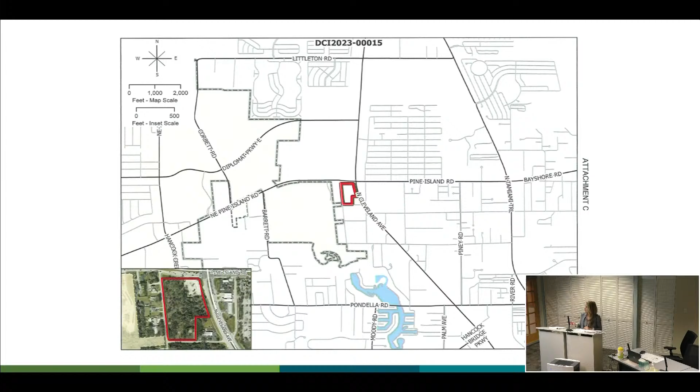The subject property is located at the southwest intersection of Pine Island Road and North Cleveland Avenue in the North Fort Myers planning community. This is an intensive urban area of the county, well served by public infrastructure.

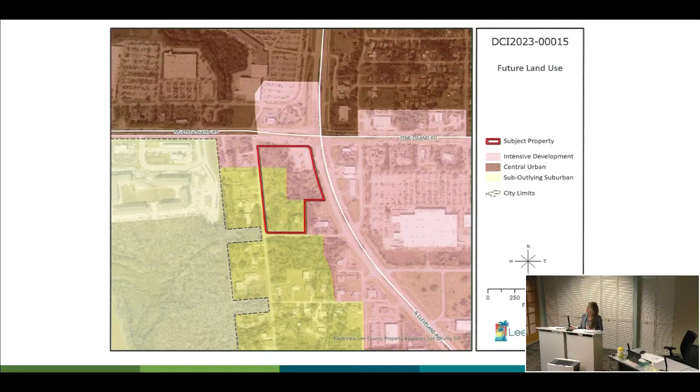Zooming in on the site, you can see the underlying future land use category. It's bifurcated between intensive development, shown in pink, which is about 5 acres of the site along those arterial frontages. The yellow depicts outlying or sub-outlying suburban, which applies to the southern portions of the site as well as that western edge, where we have reduced the intensity of uses to comply with future land use, as we'll discuss in the presentation.

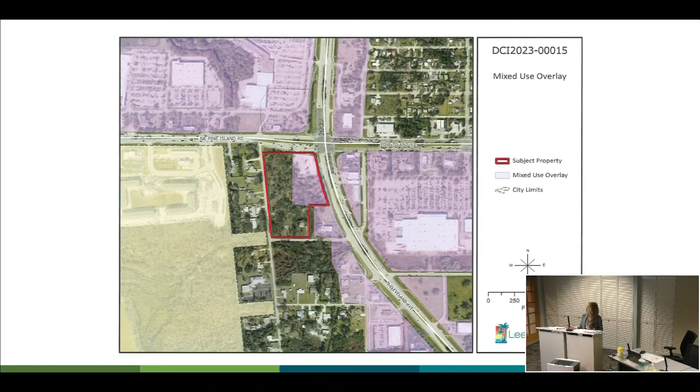The property is partially within the mixed-use overlay, which encumbers the frontage of the property. Just under 4 acres of the site, shown in purple, is within that mixed-use overlay. Lastly, we are in a mix of C1, C1A, and Ag2 zoning districts currently.

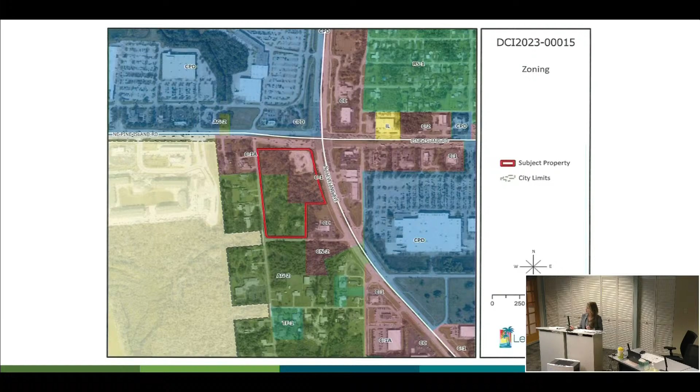In terms of surrounding uses, again, this is an urbanized area of the county, as you can see from the level of development surrounding the subject property. To our north, we have a development of regional impact and planned development zoning district known as Merchants Crossing. This has several big box retailers, restaurants, and has been recently redeveloped with an apartment component, so a very dense, intense mixed-use project immediately to our north.

As you go to the east, you have a Walmart big box retailer, as well as commercial outparcels along the North Cleveland Avenue frontage.

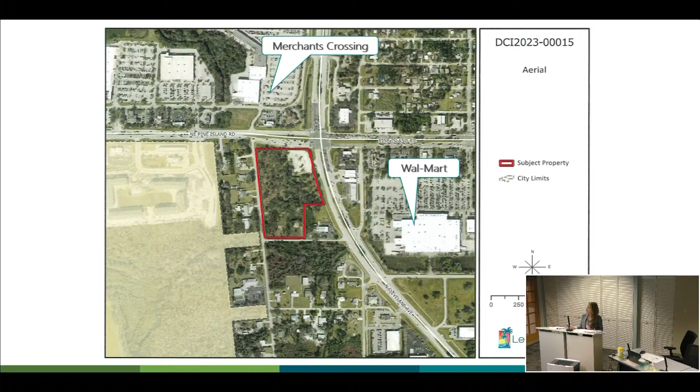To our immediate west, on the west side of Herron Road, there are some single-family residences remaining in the Ag2 zoning district that have been developed for many years and are certainly feeling the effects of the changing nature of the surrounding area, but we have buffered them carefully, as we'll walk through in the presentation today.

Also important to note, you enter into the city of Cape Coral as you move further west down Pine Island Road. This is the Jud Creek PDP area, and this is multifamily dwelling units developed at densities up to 25 units per acre per their future land use.

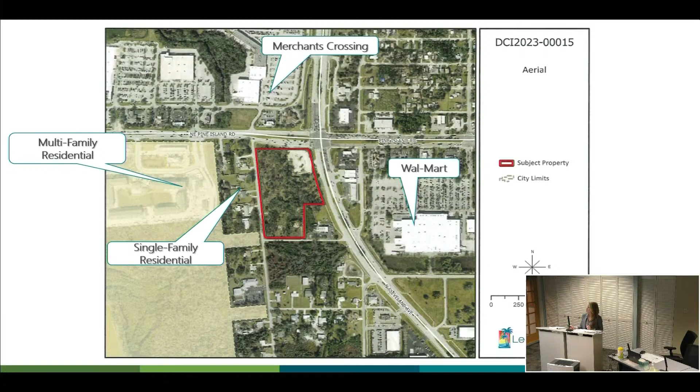This is our proposed master concept plan. We have a right-in, right-out off of North Cleveland Avenue. We also have a right-in, right-out off of Pine Island Road. We have a tertiary access point off of Herron Road as well.

There are no access points onto Pineapple Lane. It is understood Herron Road is substandard, and we will have to improve the roadway up to our driveway in accordance with Chapter 10 of the LDC. We're not seeking any relief from that requirement.

We've talked about the use areas. Our master concept plan is showing the fast food option. In terms of those use areas, the fast food will be located at the corner of the site. As you move south, we have the 7,800 square foot retail building that could include a variety of goods and service type uses. The auto repair building is further south in the property. We have the 100,000 square foot self-storage.

It's important to note the sub-outlying suburban is roughly this area of the site, as you saw on the future land use map. So we did locate the lesser intense uses of self-storage in that location for compatibility with the future land use category. But isn't the car wash also in that category? The car wash, yes, is located within the sub-outlying suburban portion of the site.

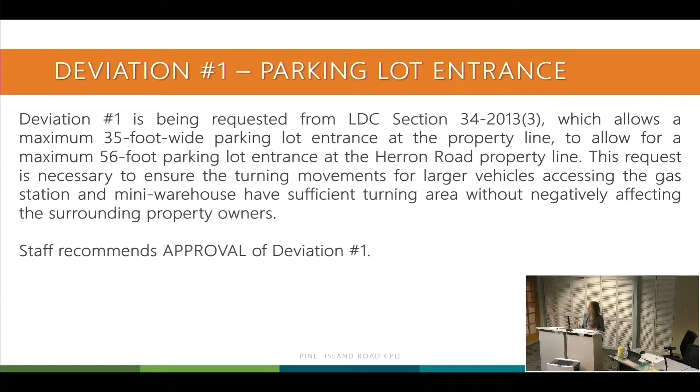So is it the intention to route the tanker trucks down Herron Road to serve the gas station? Ideally not, but it's a possibility, and so we wanted to design to that standard.

Is there a master concept plan for me to see with the gas station on it, since you're designing for it? I believe in discussions with staff it was preferred that we do not have two separate master concept plans. So where would it be configured on the site? It would be in this location at the north east corner. So that small area can accommodate the store and all the pumps? I will defer to our civil engineer, they will provide testimony a little later in our presentation. Okay, I'd like additional testimony on that, please.

Deviation 2 is related to the self-storage parking requirement. Ted Treesh prepared a parking demand study. This was based on also a previously approved parking demand study for Arborwood. Staff has reviewed the data and analysis and also recommended approval of this deviation. We would note that it would apply to both mini warehouse and public warehouse. As Ted will testify, the ITE treats these uses the same - they both fall under ITE code 151, mini warehouse. So that document would not need to change based on the addition of public warehouses. They function the same from a traffic standpoint.

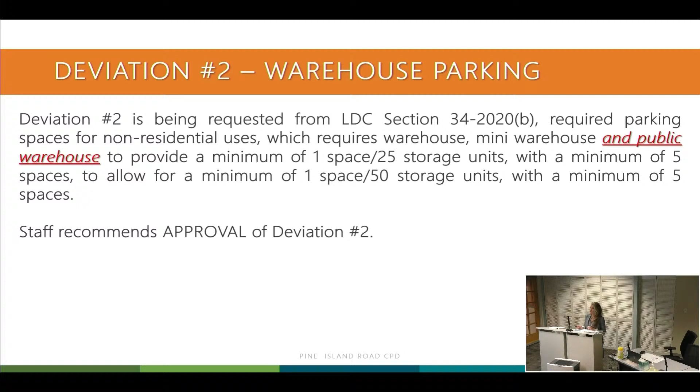This is simply, to the extent relevant, stating the definitions of warehouse, mini warehouse public, and mini warehouse in the code definitions, and they are tied together via their definitions. It's just a function of how they're accessed by patrons, with public being indoor units and mini warehouse being the garage door style of units.

So I've covered these points. They function the same. Both are going to be retail style self-storage.

Staff agreed that the parking demand analysis did not need further review upon addition of that use. Deviation 3 will be modified and added back in to apply to only one segment, and will discuss the compensatory plantings elsewhere on the site, with the intent to create a consistent buffer along that internal access way.

Okay, I will turn it over to Barrett Studgall to discuss the environmental. All right, thank you.

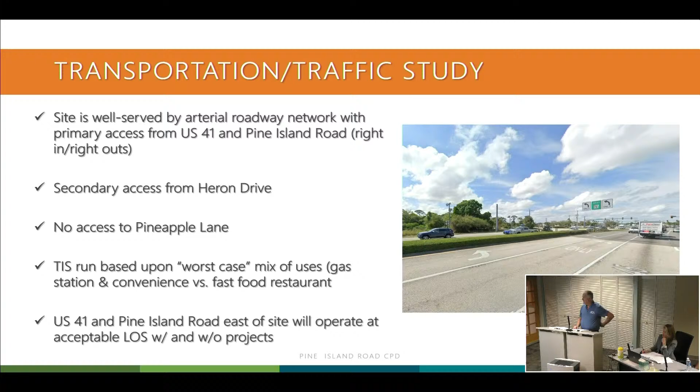We did meet with the Florida Department of Transportation to talk about this, if I could go back to the master concept plan. First, just looking at the aerial, the existing station did have a right-in, right-out on Pine Island Road. It's right here within that existing right turn lane, as you're coming eastbound on Pine Island. And then there was a right-in, right-out right here on US 41.

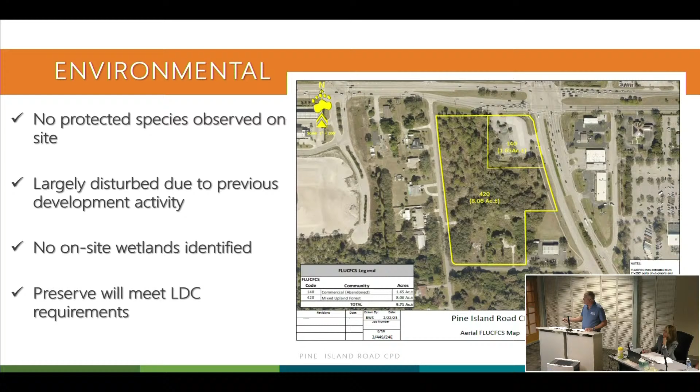So we met with DOT early on in the process. It's been quite a long time ago; this project has been going on for quite some time. We're going to lengthen the right turn lane on Pine Island Road as part of the application. That's what's shown on the master concept plan. And this driveway will be converted to a right-in only at DOT's request.

The right-in, right-out on US 41 is currently in this location, and we're shifting that down further away from the traffic signal, approximately midpoint in the property, to create a little bit more separation and to allow a right turn lane to be constructed on US 41. So you'll be adding a right turn there on Pine Island Road, extending it a little further, and then a new right turn lane along the frontage for the right-in, right-out on 41.

And then obviously, as discussed, adding the access onto Heron. And again, there was no access on Pineapple Lane. So obviously with the commercial traffic, most of the traffic is going to be concentrated onto the arterial roadways. There'll be some trips that come onto Heron, but primarily limited to the principal trips to the back end users, the self-storage, which is a low traffic generator, small user at the south end, but its primary access will be directly onto US 41.

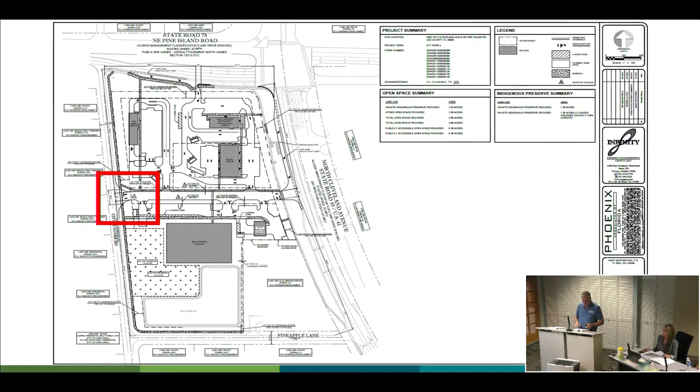Thank you, Ted. Thank you. Any questions? I was curious, Alexis, in the sub-outlying suburban land use category, can you go up to 45 feet?

Let me refer to the land development code. While I'm pulling that up, the car wash use certainly would be lower in height, but the 45 feet would be relevant to the self-storage, which is outlying suburban. I'll give you a minute to look that up. Yes, it is permitted.

And then I'd like staff and the applicant to tell me whether they've considered hours of operation on the car wash use at that location on the site. I noticed there was no condition regarding it. Has there been any discussion on that whatsoever?

There has not been, but throughout the presentation and based upon your comments, I have a list of items that I think we definitely need to address. Since we're keeping the record open, we can submit not only a revised master concept plan and deviations, but also revised conditions to address some of the things we heard to ensure compatibility of the project. With that in mind, it really does lay the foundation for plan consistency. So the notes I've written include a dumpster setback from Heron Drive.

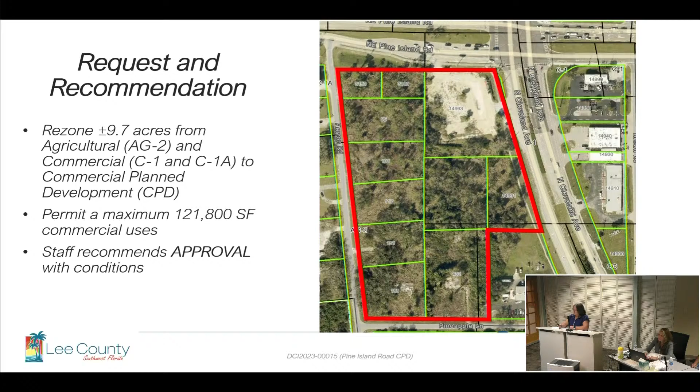The case before you today is DCI 2023-00015, Pine Island Road Commercial Planned Development. The request is to rezone 9.7 acres from agricultural and commercial, which is C1 and C1A, to commercial planned development to permit 121,800 square feet of commercial uses. Staff is recommending approval with conditions.

A little bit about the history was touched on by the applicant. I have an old aerial here from 2010 showing the old car wash and gas station in this location, with the 3 residential developments down in the southwestern portion of the project. The single family was demolished; the demo permits were in 2007. They all were demolished relatively close together, and the car wash was demoed in 2022.

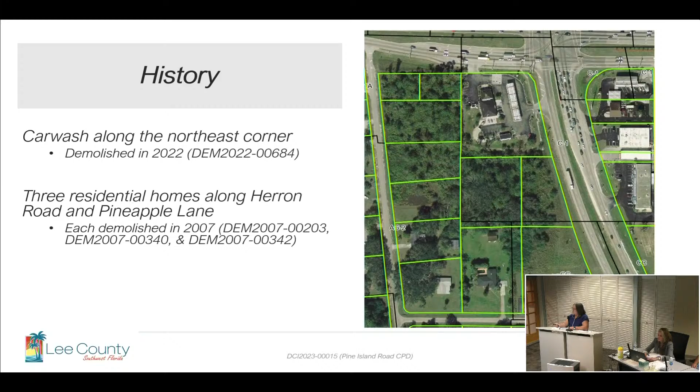Future land use category, Ms. Crespo went over. This is split in half. You have intensive development that kind of wraps around, touching North Cleveland Avenue, and then wraps around Northeast Pine Island Road. The yellow represents all of the sub-outlying suburban, which is a heavy step down from intensive development, working towards Heron Road and then the residential. Some of the C1A and the intensive development touches the property across the street to the west from Heron Road. So there's a defining line in this region right here for sub-outlying.

What that means is intensive development is typically located on major arterial roads. It can accommodate high densities and high intensities because it has all the urban services to support it. Sub-outlying suburban is more peripheral, and it can handle low densities. It is set up for public services, which may need to be provided in some areas, but it tends to be more in relation to an urban area. So it's a heavy step down here from the intensive to the sub-outlying.

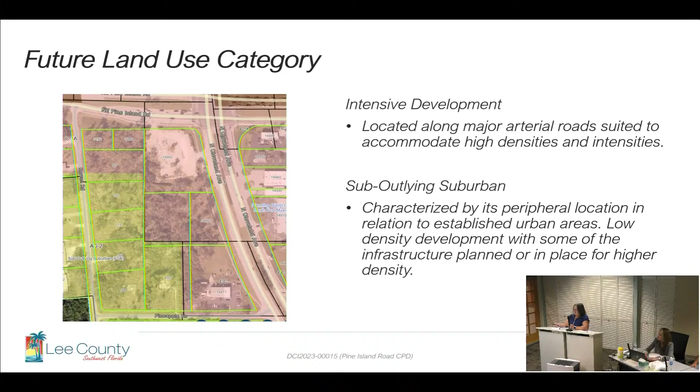Hence the design being that the warehouse is located in the southwestern corner, which is the sub-outlying suburban, and the preserve down here. So essentially, a portion of the entry road and a portion of that car wash is in sub-outlying, but the corner piece is intensive.

However, in this case, we are in the mixed use overlay, but in Land Development Code 10-424, if there is a use listed in 10-424 that you're proposing on a site, the overriding buffering requirement overrides the mixed-use overlay, and overrides the North Fort Myers community, which I'll get into in a minute.

So the applicant is proposing a car wash, or in this case, fast food, convenience food and beverage, and a gas station. Both of those uses are listed in 10-424 in Chapter 34 supplementary districts to have enhanced buffering. So when we get to the buffering section, this is where I'll touch on why there's not just a 20-foot wide buffer per the North Fort Myers plan, or why there's not just a 5-foot buffer in the MUO—because if we weren't a car wash or a convenience food and beverage or fast food, this would be 5 feet per the MUO.

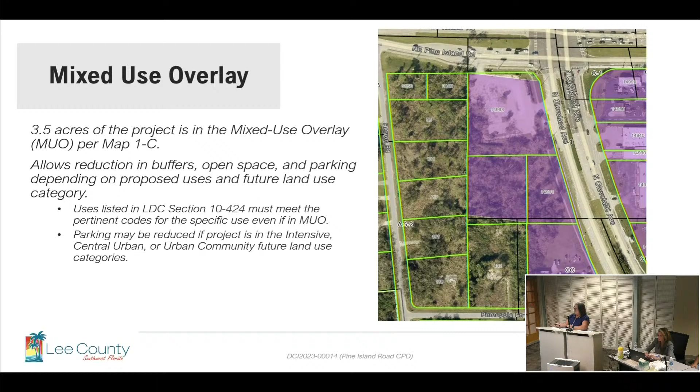So 10-424 is very important in this because it gives the list of uses that have to follow the supplementary districts in 34, and that's just in the purple area. You can see that the property is bisected by this, which makes it confusing for deviations, as well as being in the North Fort Myers community plan area. This whole entire development is in the North Fort Myers community plan area, specifically in the commercial corridor, because it's located on Northeast Pine Island Road and 41.

It is in a neighborhood center, which requires the interconnections and public open space. That got cut off, but it's a public information meeting, which Ms. Crespo went over. It was February 6th of 2024. It was held in the community, and the documentation is attached to the staff report.

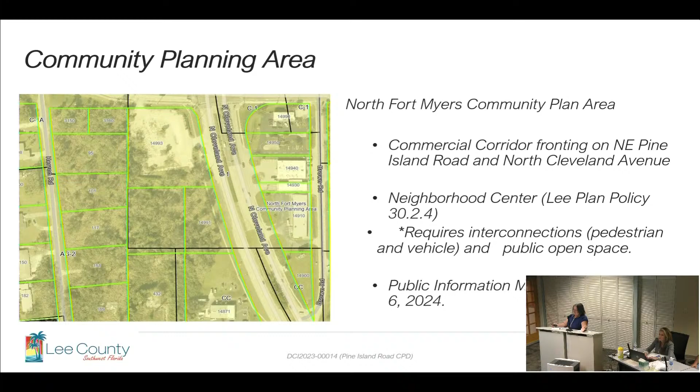So the North Fort Myers community plan, which we're going to go on into the buffering in Chapter 33, requires a whole different set of buffers. But North Fort Myers community plan, anything on buffering is trumped by the mixed use overlay unless you're one of the uses in 10-424. So we're doing this dance throughout this, which gets confusing.

So I'll go over the compatibility portion, because what the staff and applicant have tried to do with this plan is to make consistent buffering throughout, whether they be enhanced or whether it be granted through deviations, to get enhancement and compatibility with the surrounding uses.

So the character of the area, Ms. Crespo went over in detail. We do have Merchants Crossing. This has recently become, it's in the mixed use overlay, a portion of it, and it has become a series of mixed uses. So you have intense commercial development, you have the multifamily component that's been added to the north.

To the west, we have a portion along Herron Road that is in the unincorporated Lee County section that is single family homes along Herron. Even within the mixed use overlay, we have some single family homes that are in the intense development region and then the sub-outlying.

And then as you see, the hatching here represents the city of Cape Coral. In the city of Cape Coral, Judd Creek Boulevard is abutting these developments in here, these single-family homes, as well as the multifamily. You have a gas station out in front here, intense development, and then a preservation area towards the south.

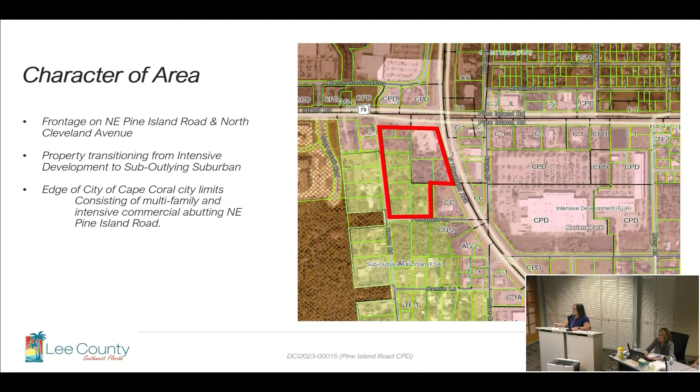This kind of goes in detail as to what is surrounding. I'm not going to go through each one, but it kind of gives you an idea as to what is happening in this region. So a lot of this over here is in the mixed use overlay now. Mixed use overlay is relatively new, in the last 5-6 years. Even in up in this portion up here, it has extended.

You do have these residents that live on Herron that all throughout the review of this development, we've been very sensitive to with the type of buffering and the step down in the uses, as well as how the site is being developed with the buildings. I'll get into that a little bit more.

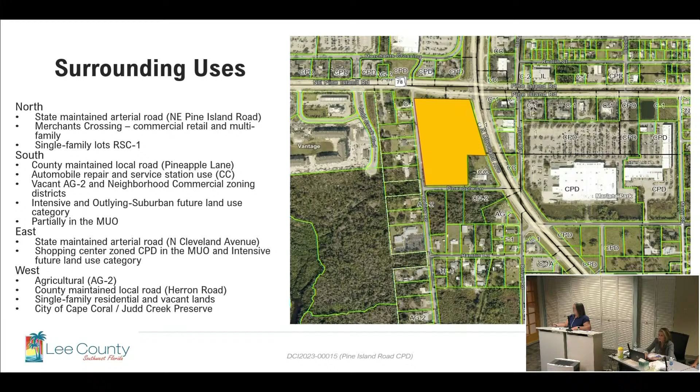So I've overlaid the development onto the aerial, kind of lining it up as best I could to what you see here. So if you remember, all of this up in here was in intensive development that was hugging Northeast Pine Island Road, and it kind of went over in this region over here. So this is all intensive. And then the intensive changes around here, where then it becomes sub-outlying suburban.

So you can see that the intensification comes from this corner right here, which could be the convenience food and beverage or fast food, to a lesser degree. The car wash, yes, intense. The hours of operation could be limited.

However, the working part of this car wash, the drive aisles where people would go in and out of, are all on the exterior, further away from the residential, with the 30-foot buffer here. So instead of flipping it and having all the workings on that side to the west, the building is pushed up against this way, so there's no driveway on this backside. This is all open space buffer.

And what you see before you is the open space portion of the master concept plan. There's a second sheet to the master concept plan that has the open space defined on it, with regular open space and public open space. The public open space is what's required in the neighborhood center part of North Fort Myers. So you can see where the intensification is lessened by the positioning of this building, the working driveway interior to the site. This has been mentioned before. This is a lesser use, the outdoor or indoor storage facility, and then the preservation area.

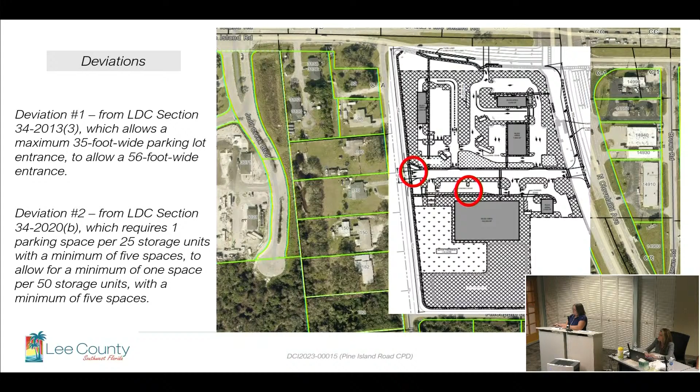Deviation 3 I'm going to get to, and that's the internal buffer, because that's where we're doing the dance between North Fort Myers mixed use overlay, and then the fast food, convenience food and beverage, car wash code in Chapter 34. So we're jumping from 10, 34, 33. And that's where staff and applicant believe we still need the deviation from a 20-foot required buffer down to 15, and I'll go over that a little bit more.

The traffic compatibility - staff looked at this. The applicant provided their traffic impact statement. The Department of Transportation reviewed and provided a staff memorandum stating there's sufficient capacity to accommodate new trips. The arterial roads to the north and east, the main access, provide a sufficient way to get in and out of the site. The self-storage is a low trip generator on Herron, the local road, and North Cleveland Avenue, and it won't have a detrimental effect on the surrounding uses.

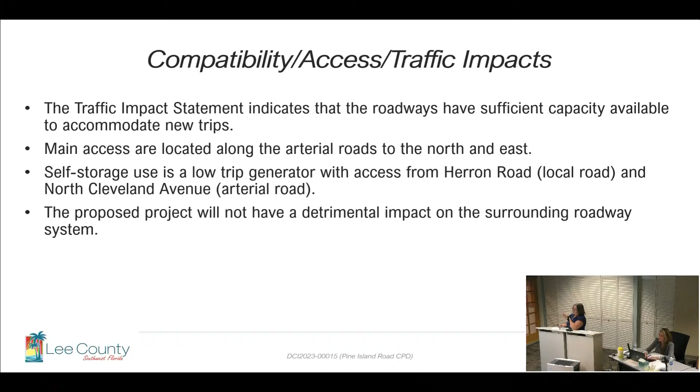With or without the property, the roadways are failing and will need some sort of off-site improvements, which will be looked at and reviewed at time of development. That cannot be looked at, at time of zoning at this time. The applicant has provided some details of the extension of the turn lane on Northeast Pine Island Road, as well as some of the road improvements that will go on 41, working with FDOT on both of those.

So here's the buffering, going step by step. This is the north property line, and this is Pine Island Road. There's that turn lane improvement Mr. Treesh was talking about. So this is a 25-foot wide buffer to support the fast food, convenience food and beverage store, as well as the car wash or the gas station.

Chapter 34, 1353 requires this. This portion is in the mixed use overlay. This portion is not. All of it's in the North Fort Myers Code.

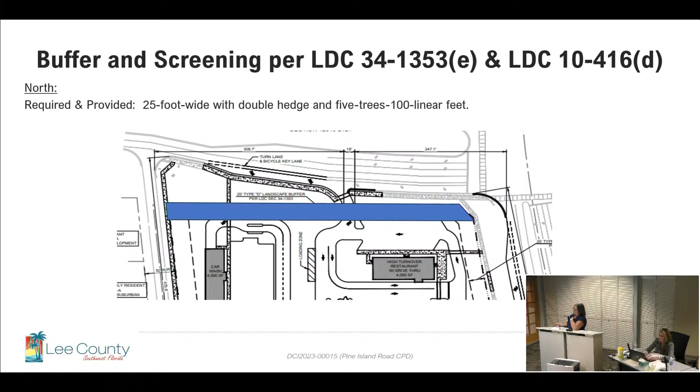North Fort Myers Code 33-1581 requires a 20-foot buffer on right-of-ways. Mixed use overlay requires a 5-foot, unless you're a listed use. Both of these are listed uses in 10-424, so it sends you to the supplementary district, which requires a 25-foot wide buffer.

So that's the north property line. The south property line on Pineapple is all in the North Fort Myers Code. It doesn't really touch, the mixed use overlay is over in this area. So this requires the 15-foot wide type D buffer in this region.

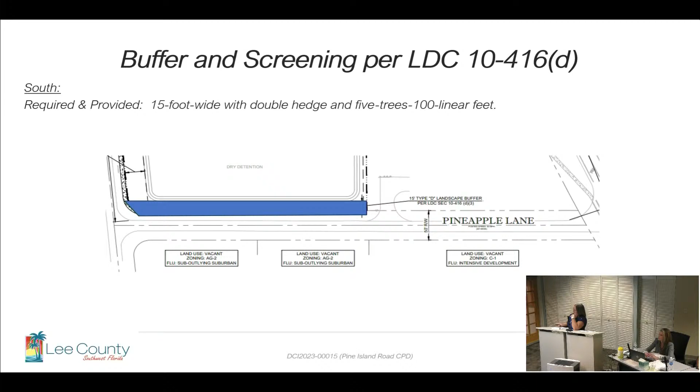The buffer along Heron is required to be a 25-foot buffer with a double hedge and 5 trees per 100 linear feet in this region, or I'm sorry, along 41 — I'm in the wrong location — 41, to support the fast food, convenience food and beverage, or the gas station.

There's an auto service station down here that's providing the enhancement. So this is all the same buffer.

This would be required a 5-foot, because it's in the mixed use overlay. So this section is in the mixed use overlay. This is not in a supplementary district, so it would be a 5-foot buffer. This portion is in the supplementary district. It would be a 25-foot buffer by code.

So where does it drop down to 5? It would drop down to 5 here if we didn't have an enhancement in this region right here. 25 for the length of it, because what staff is trying to do is have a consistent buffer, a consistent look to the site.

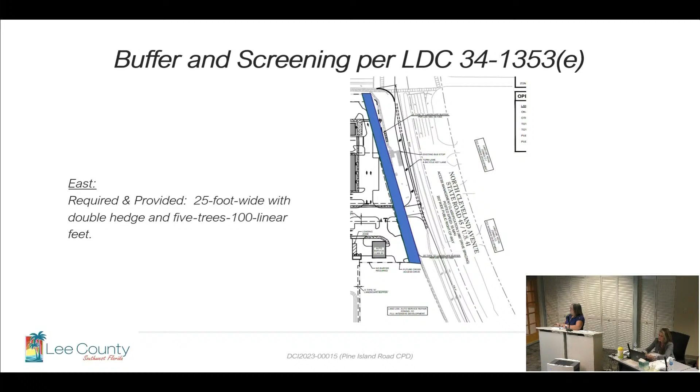So this is the internal access way. So the mixed use overlay is covering this section right in here. The auto service station would be required a 5-foot internal buffer to this right of way. It's providing a 15. This area right in here is the convenience food and beverage or fast food, which requires a 15-foot wide buffer per 34.

So this is 34, 15-foot for internal roads. This is the MUO, 5-foot, but providing an enhanced 15-foot per 34 to match what's across the street. So this is all matching in the MUO.

As we work towards the west, we have car wash, needs to meet 34, 15-foot for internal access way. Then the warehouse, which is not in the MUO, mixed use overlay. It's in the North Fort Myers, which requires a 20-foot right-of-way buffer to the right-of-way. The applicant is providing 15.

This is where the deviation is needed in this region right here. Because North Fort Myers requires the right-of-way buffer, called a type D as in dog, has the same content — 5 trees every 100 linear feet, double staggered hedgerow — but it's 20 feet on the right-of-way. So in a way to have consistency along this internal access way, to provide all 15, this would need that deviation. That was deviation 3.

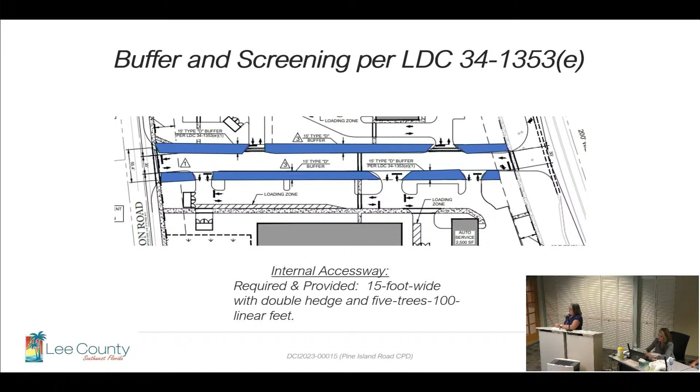So I wanted to take the time to go over that in detail because compatibility tends to link up with buffering and the way you design the site for your buildings and your intensifications on the site. Sometimes the buffering can provide screening and compatibility for an intense use.

So this would be Heron. Heron is a 30-foot wide buffer all the way down. The reason it's a 30-foot type F buffer is because part of the drive for this car wash is abutting the right-of-way, but we call it the 125-foot rule. If you have drives or parking within 125 feet of a single-family use, you have to provide an F buffer. So the F buffer is running all the way down this.

Even though we have preserve abutting, we have some drive aisles within 125 feet here, and then we have no driving behind this building, but we are in close proximity to these single-family uses. So staff worked with the applicant to put the 30-foot type F in to be compatible, to have consistency all the way down Heron, so it was a cohesive development. So it all looks the same.

And there's a condition in the preserve area that requires the restoration that Barrett was talking about, that 6-foot restoration trees. Anything planted along here that meets a 30-foot for restoration must meet the planting requirements for the F buffer, which is increased heights on the trees and shrubs along this area right here.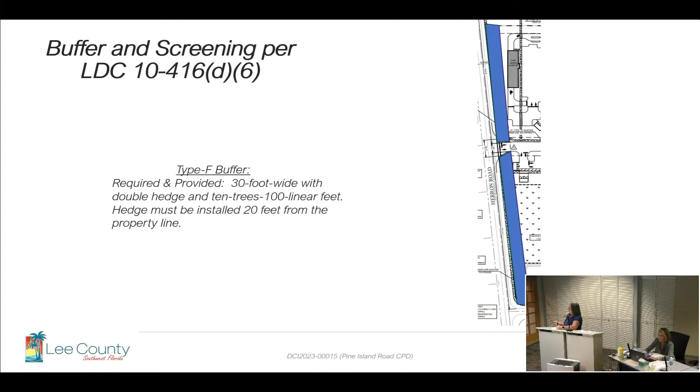So the open space straddles too. Outside of the mixed use overlay, you have a 30% requirement for your open space. If you're in the mixed use overlay, you have 20% on large developments. So we have a straddling happening with this too.

And so that's where the separation happens. 6.22 acres is outside of the mixed use overlay, and then the 3.49 acres is inside. And so that's how the open space is derived.

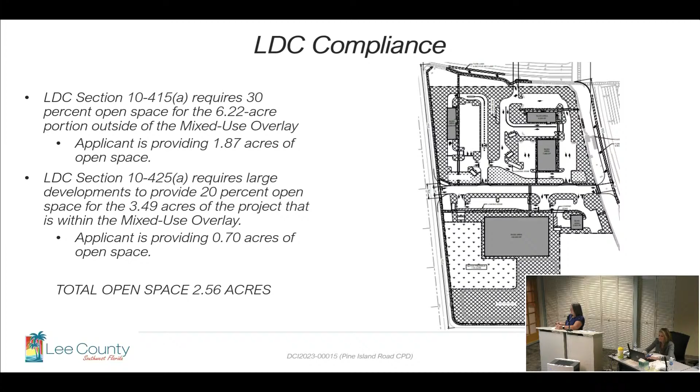Half of that is represented in the indigenous open space, which is in this area right here, which does have some indigenous scattered in it. But the applicant is restoring, and through the restoration process is receiving credits for the size of the preserve, being 1 acre and adjacent to right-of-ways. So it gets a 135% credit.

This is the indigenous restoration list. There was some talk about the 48-hour letter and how the stormwater management was being designed to have outfall into this preserve. This preserve is an upland preserve. The way we view the habitat numbers on this, according to the environmental review, is an upland preserve, and the restoration being designed is all upland species.

So if we were to go forward with the drainage or the surface water management, all of the efforts being put forth for restoration would die because it wouldn't survive the outfall. And then I noted on this slide that condition 7 is the height requirements for that F buffer when they're doing the restoration. So these plants right here, anything that goes in there will have to meet the requirements of that F buffer in the code.

So urban services are being provided. This is kind of looked at as partially an infill project because it was developed. So there are urban services. There are bus stops in close proximity. EMS and fire is located to the south, closer to the bridge.

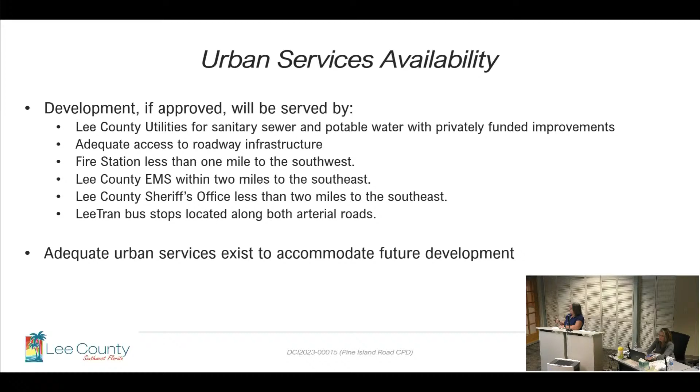So the commercial Lee Plan compliance, staff does find that this is compatible through the site design standards that we went through and the enhancements that are being provided. Though some are being met through the type F buffer along Heron Road, they're being carried over all up and down Heron. So not only do you have a 125-foot rule happening in sporadic areas, but we're carrying that buffer all the way down to provide screening for the single family across the street.

The positioning of the car wash was looked at—we flipped it at one point because the working part of the car wash was on the Heron Road side, which would have had the vacuums and things like that happening. So by flipping it to the internal, you have more of that intensification geared towards the internal, towards the fast food, convenience food and beverage, or the gas station.

So the storage facility and the preserve are less intense, as has been mentioned several times. That's kind of how Heron was looked at for that step down in the outlying suburban, and then the adequate facilities, and then the compatibility with existing planned residential uses.

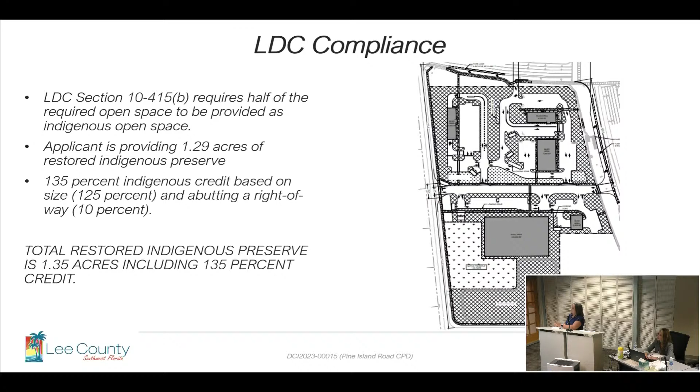So we can discuss and work on that for compatibility of that portion. Going through urban services, staff found this sufficient with what we had, and we were able to approve it because of all the enhancements we put on this. So staff finds it as conditioned, meets the findings, and we approve it.

So you're comfortable with the access on Heron, enhanced to handle large vehicles? The way staff was reviewing it was for the storage facility. Right, but you understand there's - I totally understand.

I don't know, sitting here today listening to testimony, if trucks-only signage or something would work, if it's the tankers. Well, if you have an 18-wheeler in that direction and they see a sign saying no tankers, there's no backing up - they're going. They've got this big wide driveway, they're already in position, they're gonna pull out, head north, get on Pine. I'm not a traffic engineer, so...

I feel really uncomfortable discussing all that. I'm more concerned about introducing this type of traffic into this street with this land use category. I just wanted to know if you'd thought about it, that's all. Thinking about it now, the throat deviation for that entry point was looked at for the storage, because we were hypersensitive to the storage and the parking deviation.

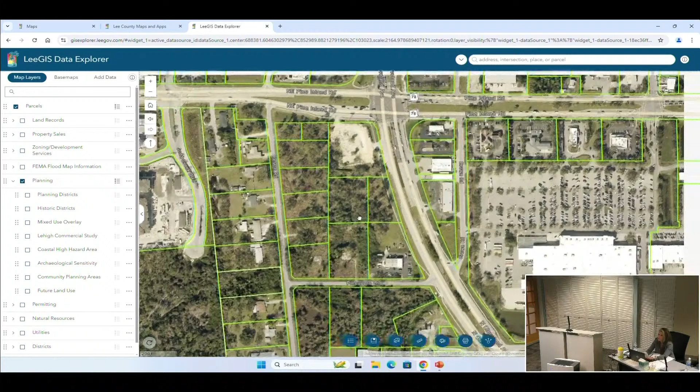Members of the public, I noticed you came in after I administered the oath. All testimony and evidence I accept during these hearings must be taken under oath, so when you come to the podium I will swear you in. After you state your name, we'll put an aerial up on the screen. If you can indicate where you live in relation to the project, that'll help us put your remarks into context. You may speak as long as you like, but you only have one opportunity to speak, so please organize your thoughts before you go to the podium.

Something else I want you to know: while you can speak here as long as you like, at the final board hearing they are the final decision makers. I only prepare a recommendation. You will only be permitted 3 minutes to speak there, so think ahead and crystallize your concerns to those most important to you at that stage. But today, you can speak for as long as you like.

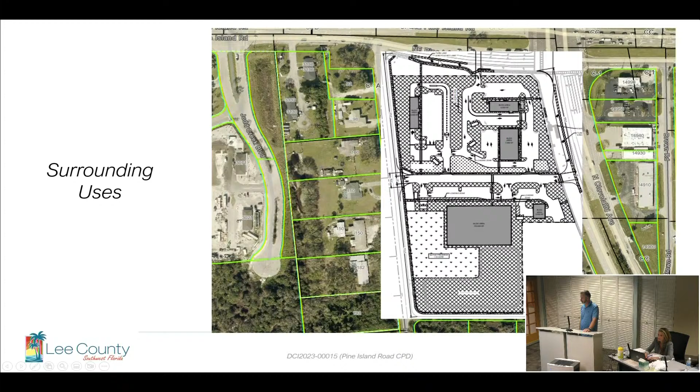This is all off-site. Okay, can I go back to the future land use map? Thank you.

I'm sorry, you raised some questions to me. I just wanted to have some things clarified. And I'm sure it's hard to work all that out, and I know you have to fit the maximum amount of stuff in a certain space to make it worth it financially, and I do understand that as someone who's in business.

But I also understand that we have to do our best to protect our residential road that is already seeing more than its fair share of traffic based on the apartments and cutting off the corner of the red light there with hundreds of cars already. And now we're talking about adding a road in the middle between Pineapple and Pine Island, in the middle of Heron Road, that not only can be used as a cutoff, but there's no reason for people to even go to 41 if they can get where they want using a residential road like Heron. I think that has to be a consideration because of all the kids and families that live there.

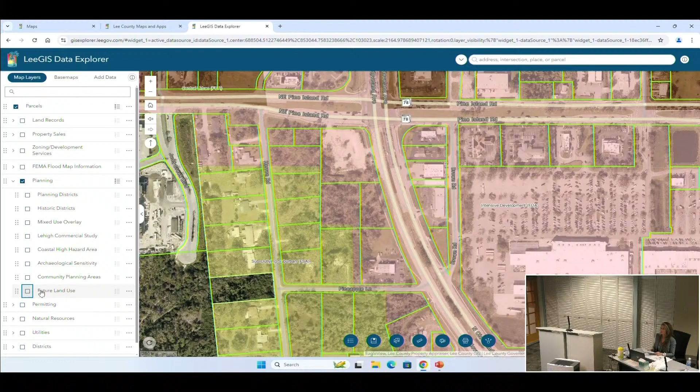I think the public raised a couple of issues, particularly with regard to drainage. It might be helpful if that could be clarified on the record, how they will not be impacted any further by virtue of the way the stormwater system is designed.

Brett Neverell, Infinity Engineering Group. With respect to the stormwater, we will design to both Lee County and South Florida requirements. We will attenuate, meaning we will design a pond to hold water and meter it out to existing conditions. So if they have 10 CFS going off our site in existing conditions, we would have 10 CFS of flow going out at the same time frame. We will design for 5, 10, and 25-year storm events to do that.

So there will be no increase in peak discharge rate. That's the intent of the stormwater pond—it will hold water temporarily and slowly let it out based on historical rate, along with water treatment. Everything flows into this detention area and they hold it. It rises up to a certain level and then starts to bleed out. It can't bleed out at a rate faster than how the property today drains to those swales in the neighborhood. They designed this retention area to hold up to a 3-day storm event worth of water, and that's standard for any development in the county.

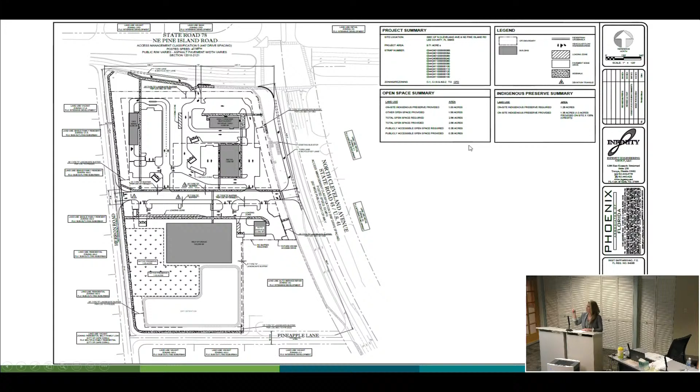If you can go back to the aerial and zoom out a little bit—wonderful. I appreciate their comments and the way they address that they understand the site's going to be developed. They understand they're not in a rural or an area that would generally be characterized as residential. This is one street—really two streets that are an anomaly in this area now. Everything has converted to high density, high intensity, and this is just a remaining remnant of single-family residential that predates the infrastructure improvements, the development of these super center shopping centers, the mixed-use overlay, et cetera.

I believe from your comments you are taking into account the fact that we are in a very unique situation where you have the most intensive future land use category with intensive development on more than half the site, and then it just drops off a cliff to sub-outlying suburban on the other side of the site. So we're definitely trying to balance all those things. There are protections in the Lee Plan and Code for protection of existing residential uses, which is what we need to prove through forthcoming resubmittal.

We did look at connecting to Pineapple. The only reason anyone is going to want to get onto Heron is to go up onto Pine Island and make a U-turn. If we direct traffic to Pineapple, they will then proceed to Heron and go along a longer strip of the road, based on our belief of who's going to want to utilize that access. So we don't believe that connecting to Pineapple will eliminate use of the roadway.

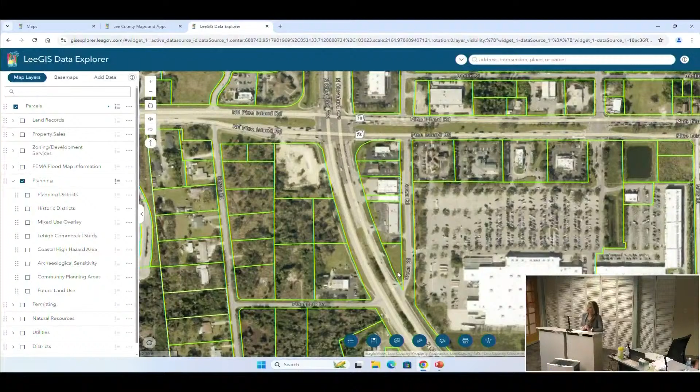That's in the intense land use. It's in the mixed-use overlay, or closer to the mixed-use overlay. It's close to an arterial, it's further from the dwellings. You know, I would really like to have you sharpen your pencil on how to make that as compatible as possible with this long-standing neighborhood that is to your west.

Yes, we will definitely be submitting a revised master concept plan. We'll examine reorientation of the building.

I would like you to revisit the dumpster locations, certainly for the self-storage. I see that there's 2 dumpsters right there on Heron Road, which is literally your access, directly across the street from a house. We will look to eliminate one of those dumpsters and then relocate the remaining dumpster further into the site and away from the western property line.

Okay, I look forward to seeing your revised master concept plan and proposed conditions. Depending on what it looks like, I may reopen the hearing so that there can be additional discussion on the record, because we don't normally do this level of change, and I would like to see what this plan looks like with the gas station, what changes. If it's in the north corner, I'm less concerned about it. My biggest concern is the intensity of development alongside Heron, including the access.

So, yes, thank you. Okay, so let's set a date. I think I'm looking at August 30th to provide sufficient time. That's a little over 2 weeks. Friday, August 30th? Okay, so we'll say Friday, August 30th, end of business. If you need additional time, please send an email to Maria Perez in my office, and we will certainly extend that if you need additional time.

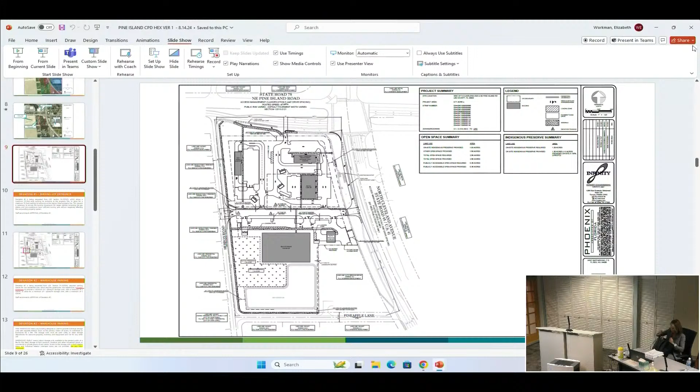In any event, I will be incorporating this into my recommendation to the Board of County Commissioners, which you will receive a copy of via email if you provided your email address. You will also receive further notice of the final board hearing via email if you provided the address, and then you can speak to the Board of County Commissioners at that meeting. Just a reminder, though, you're only going to get 3 minutes at that stage, so you really want to crystallize what you want to say so you can get it out in 3 minutes before they get the hook out.